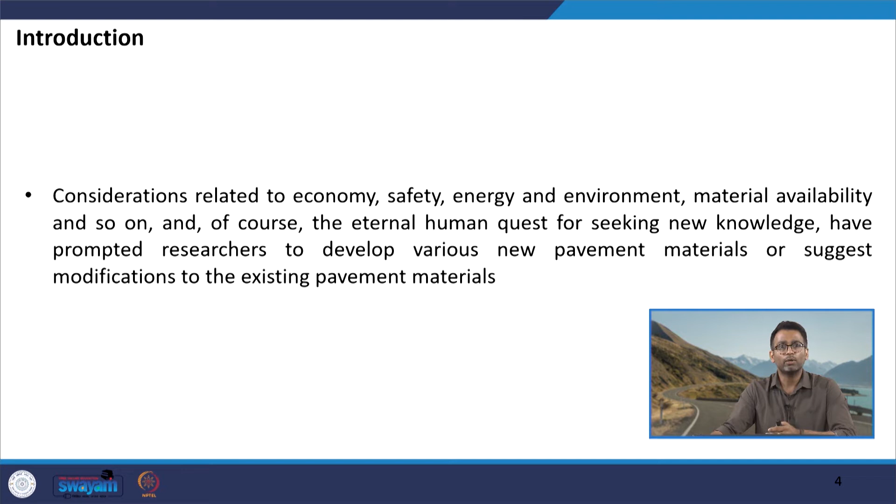So, considerations that are related to economy, safety, energy and environment, also material availability and several other factors have led to the development of new pavement materials, and also have led to the development of technologies that modify the existing materials so that we can optimize their use. So, there is always an eternal human quest to learn new things, to develop new things, and to see if these new materials that are being developed can be successfully applied in various practices.

With this, let us start to talk about some of these materials which recently have been very popular, especially when we talk about their use in asphalt pavements as well as concrete pavements. So, we will start talking about the materials related to asphalt pavements first, and then we will conclude by talking about the developments in the area of cementitious materials as well. So, if you talk about the development in asphalt binders, various technologies can be listed. For example, use of polymers.

We have already discussed polymer modified binder, what they are, but these polymers in different forms are being developed and are being used at varying dosages to improve the rheological response, to improve the mechanical response of asphalt mixtures. Polymers are being used both in virgin and in recycled form. So, for example, if you talk about plastic, we have waste plastics, we have virgin plastics. Similarly, there are several other polymers which can be basically categorized into two broad domains: elastomers and plastomers. So, several elastomers and plastomers have been experimented with and have been very successful as modifiers for asphalt binder.

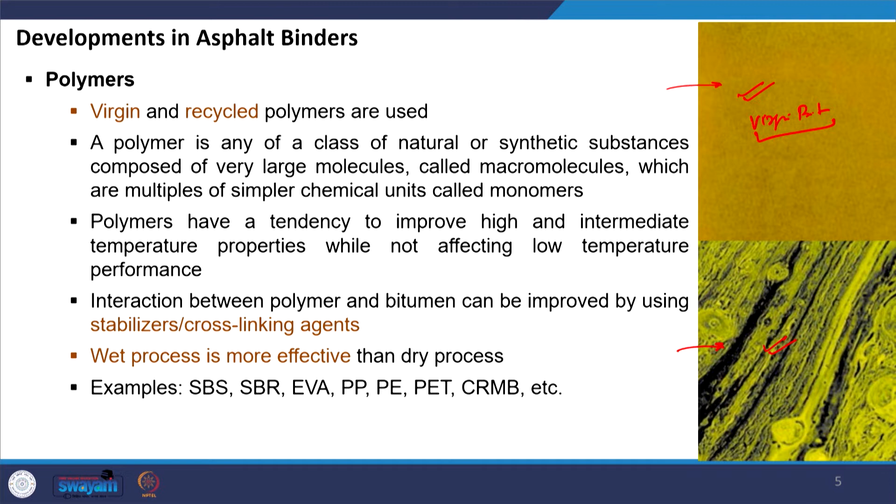In this picture, you can see the microstructure of two different binders. This is what you see when you have only the virgin bitumen under fluorescence microscopy, and here is a picture of bitumen modified with a certain polymer, where you can see a very cross linked state of the base bitumen with the polymeric system. These techniques are usually used to see the compatibility of the bitumen with the polymeric system.

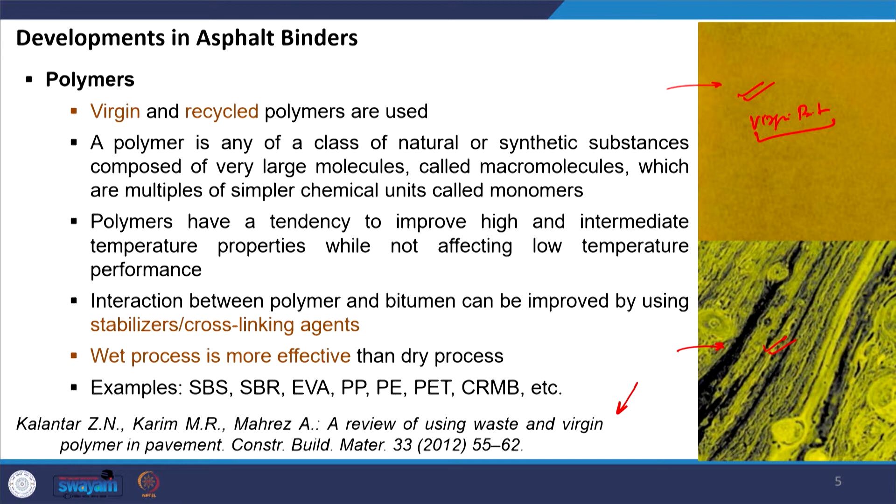In this lecture, I have also tried to include the respective reference from where most of the details of any particular slide have been taken. So, you can visit this paper and get to know more about the topics we will be discussing today.

Then we have nanomaterials, something which is becoming more popular in bitumen modification. Nanomaterials have some specific characteristics. They have high specific surface area, that is, surface area per unit volume is very high. They are small in size, as low as 10 to the power -9 meters. When we define a nanomaterial, at least one dimension should be within 1 to 100 nanometers.

Nanomaterials can be incorporated either through dry blending, where they are directly added to the binder, or through solvent blending, where they are first blended with a solvent, which is then used to modify the bitumen. Various types have been experimented in asphalt mixtures: nanocarbon, nanoclay, nanosilica, nano TiO2, that is titanium dioxide, nano CaCO3, nanopolymers, and various other nanomaterials.

Some disadvantages of nanomaterials are that it is not very easy to synthesize them in the laboratory. It takes a lot of effort and high end equipment. The cost of nanomaterials is also very high, so in industry people are always skeptical about their use because the cost of modification increases.

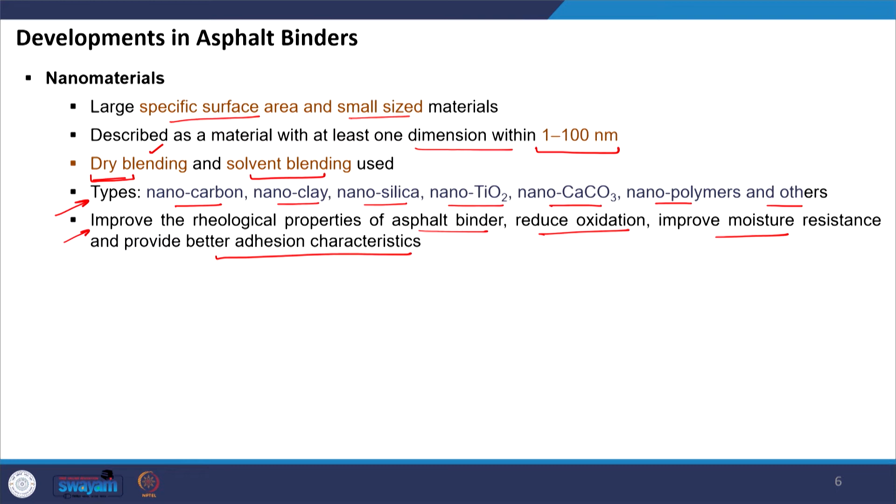They reduce oxidation, which means they reduce the aging in the binder. They improve moisture resistance, and also they provide better adhesion characteristics. So these advantages make nanomaterials one of the very attractive technologies, especially when we talk about bitumen modification. This picture shows the mechanism through which, let us say, the aging can be reduced.

So you see, when you have a normal binder, when oxygen ingresses in this way, it has a direct path to come in and attack the bitumen. Similarly, the volatiles or the lighter components in the bitumen are free to move whenever the temperature increases. But when you have nanomaterials, they interfere with these processes.

For example, you can see the path of the oxygen ingress is hindered by the presence of the nanomaterials within the bitumen system. Similarly, you can see how the volatile components find it difficult to go out once the temperature is increased because of the presence of these nano platelets. So this is the review paper which you can refer to for more details about the use of nanomaterials in asphalt mixtures.

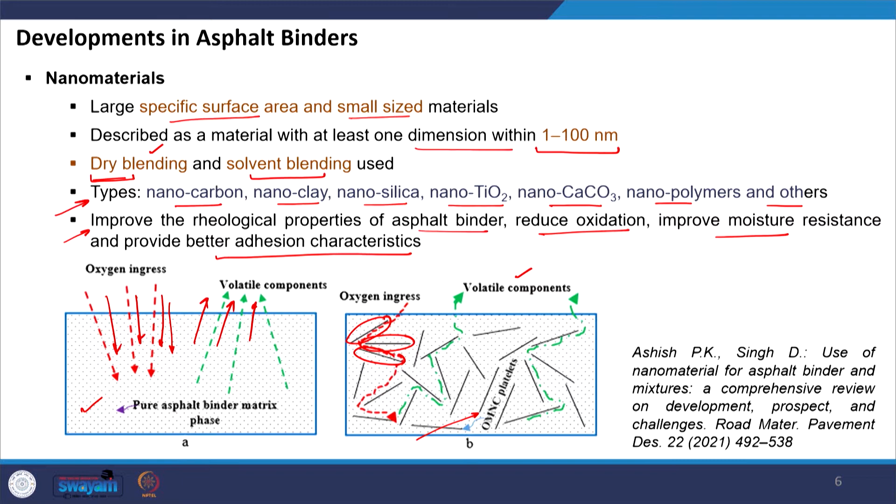Then we also have antioxidants. So antioxidants are basically materials that help us to improve the resistance of bitumen towards aging, and we have already discussed in detail the aging phenomena, which is the accumulation process of diverse detrimental changes, and these changes are built in probably because of oxidation,

loss of volatiles. Here when we say loss of volatiles, it means evaporation of the lighter components, and then we also have the effect of UV radiation, which is a long term process once the bituminous mixture is laid in the pavement, and because of UV radiation further aging of the mixture can take place. So we have several categories here. We have chemical antioxidants. We can also use organic and petroleum based rejuvenators to improve the resistance towards aging.

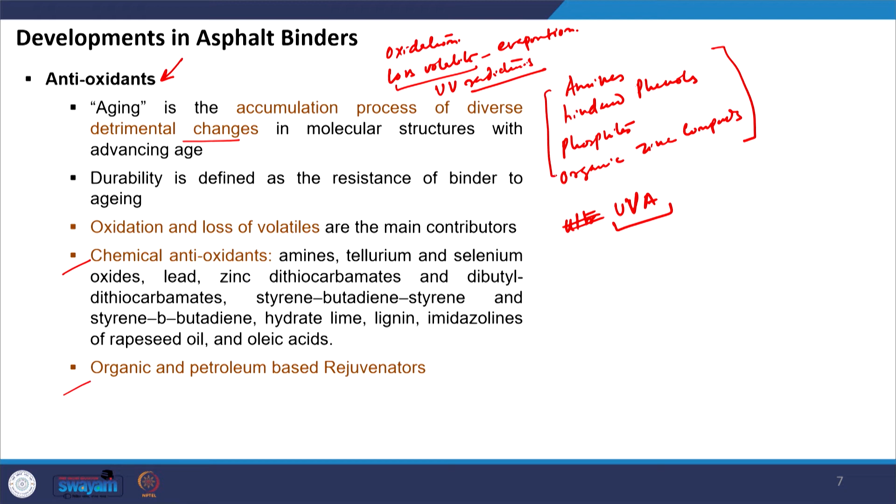When you talk about antioxidants, some of the very commonly used are amines. We have hindered phenols, we have phosphites, we also have organic zinc compounds that are being used. And we also have another category which is called ultraviolet absorbers, UVA. So these are again some of the materials that can be used to increase the resistance of the binder against aging. And ultimately, what is the mechanism on which these modifiers or agents work?

They inhibit the formation of peroxides, which further leads to aging, and/or they have a tendency to absorb free radicals such that oxidation of the binder can be restricted. So, this is about the different antioxidant materials that are being used.

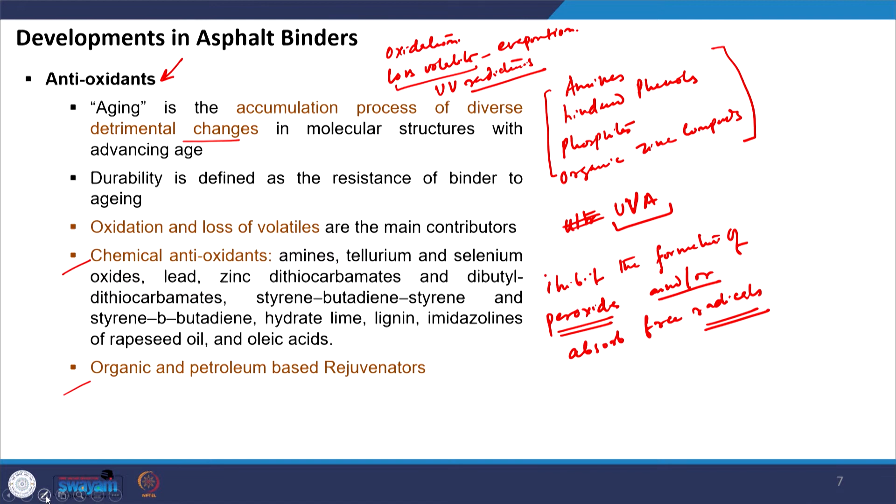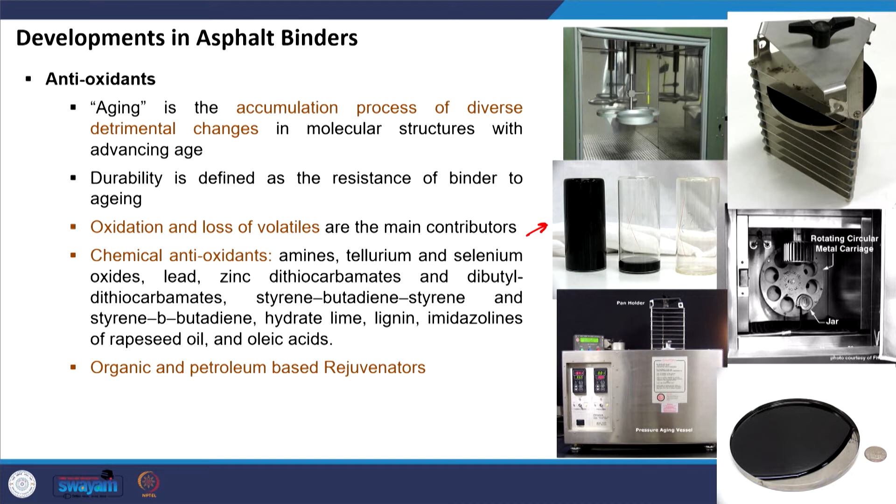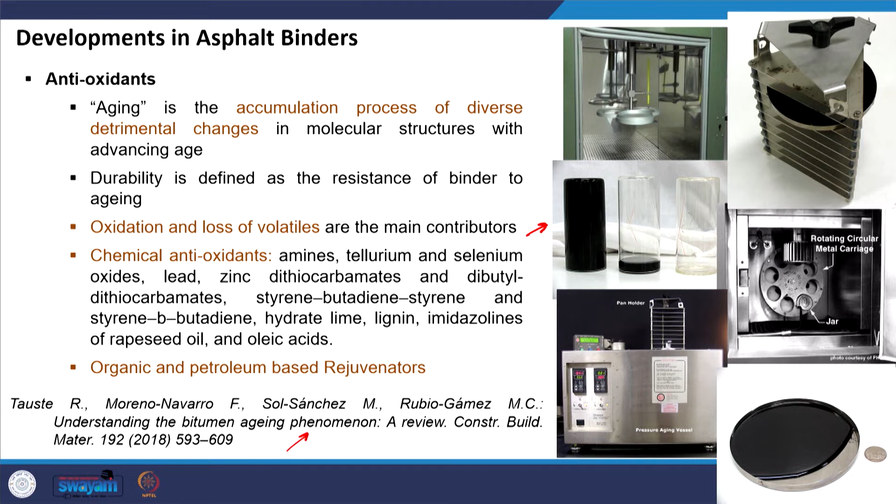Well, this picture shows that we have two types of aging. I am not going to discuss it because we have already discussed in detail short term aging and long term aging, and I hope by now we understand both these forms of aging. So, this is the paper you can refer to which is related to the aging phenomena in bitumen, and they have also given much information about the different antioxidants that are used or can be used as agents to reduce the aging susceptibility of asphalt mixtures.

We also have anti-stripping agents. These are used to resist moisture damage in asphalt mixtures. Again, anti-stripping agents can be of different types. Commonly, liquid anti-stripping agents are used. These liquid anti-strip agents are surface active agents that can be added directly to the asphalt binder, to emulsion, or to cutbacks if we are talking about cold bituminous mixtures as well. These are very popularly adopted by various transportation agencies to mitigate moisture susceptibility of asphalt mixtures.

So, when they are added to the asphalt binder, they reduce the surface tension and they increase the wettability of aggregates. Now, these are almost linked to each other, because if I am trying to wet a surface with another material, there will be an inherent resistance to this wettability.

And this is because of the individual surface energy properties. So, if I reduce the surface tension between these two materials, the bitumen will easily wet the aggregate surface, and this will also lead to better adhesion or higher resistance towards moisture damage.

The dosage of liquid anti-strip agents usually falls in the range of 0.1 to 3%, and these liquid anti-strip agents are either silane based or amine based materials. Okay. So, there are various materials, but originally they are either silane based or amine based.

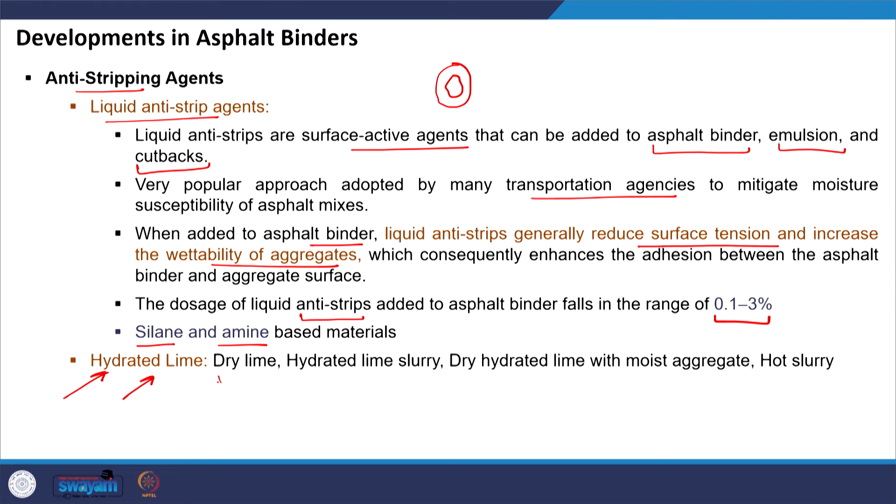So, in fact, hydrated lime can also be added in different forms. We can add dry lime, we can add hydrated lime slurry, we can add dry hydrated lime with moist aggregate, again the reaction will lead to the formation of further products. Some researchers have also added it in the form of hot slurry, and the process of addition will also finally affect the extent of resistance to moisture damage the hydrated lime will provide. So, it is important that we decide which process should be adopted.

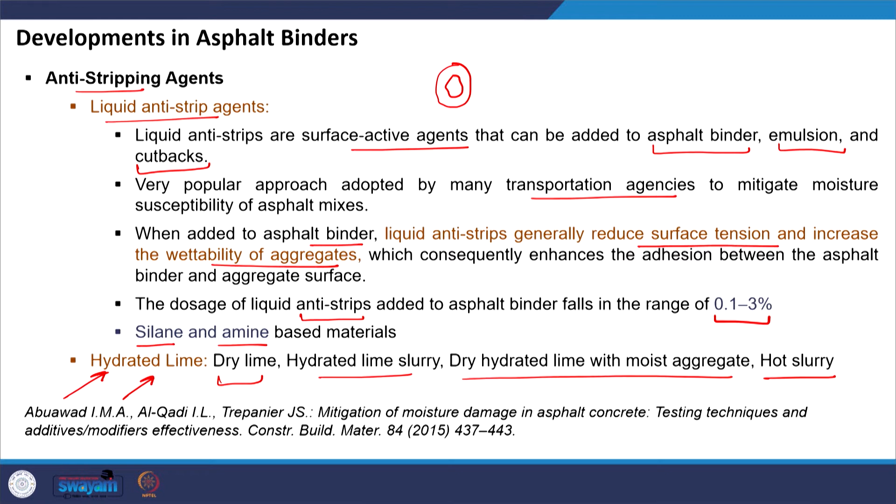So, this is one of the papers you can refer to for knowing more about the moisture damage in asphalt mixtures. Another interesting material that can be used are thermochromic materials. So, these materials will change the color of the pavement depending on the ambient light. Okay. So, these are materials that have higher reflectivity as well as emissivity to solar radiation.

Now, other than thermochromic materials, there are other materials as well that have high reflectivity and emissivity characteristics, and these technologies we call cool pavement technologies. But it can happen that some of these technologies can lead to low temperature distresses. So, what is the advantage of thermochromic materials? They will reflect solar energy at high temperature, all right, and they will reflect less solar energy at low temperature. So, how does it happen?

This can happen by changing the surface color of the pavement. So, try to understand that if you have a very dark surface, it will have a tendency to absorb the heat. If you have a light surface, it will have a tendency to reflect the solar energy or the radiations that are coming. So, in the daytime or in the summers when the temperature increases, I want my pavement to look lighter, and when the temperature falls, I want my pavement to have dark characteristics, so that the stiffness properties can be maintained at both temperature ranges.

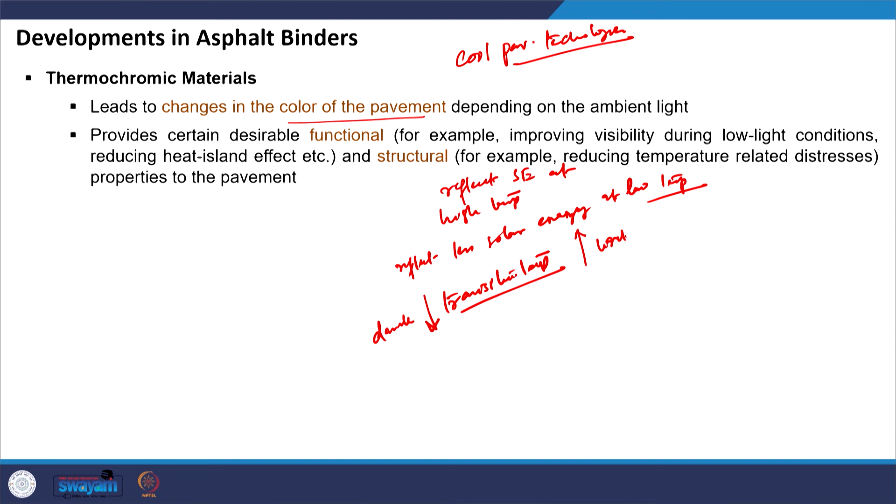So, these materials have some specific transition temperature. Below the transition temperature they become dark, and when the temperature increases they become light in color. This way they are able to provide resistance towards distresses related to high and low temperature in the asphalt pavement, and they are typically used at a rate of almost 5 to 6% by weight of the binder.

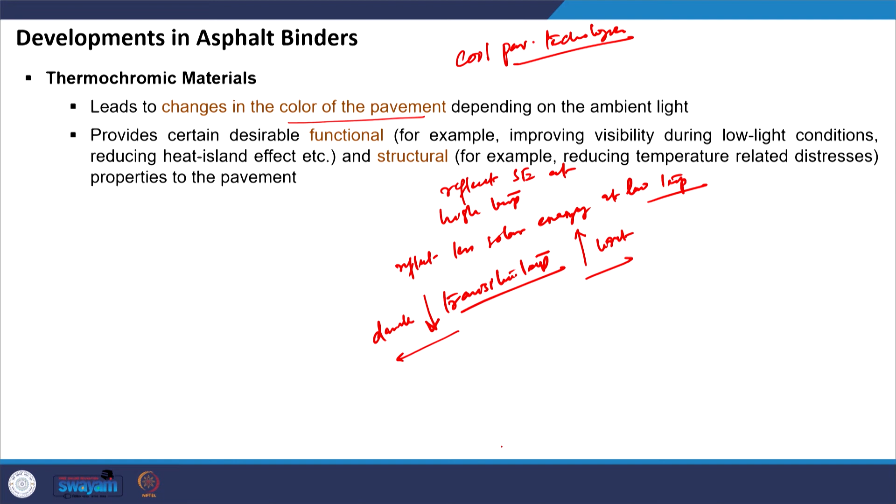Then researchers are also trying to explore avenues for alternate binders, because we understand that bitumen is a petroleum product, crude oil prices are rising, and it's derived from a non-renewable energy source. So, therefore, various attempts have been made and are being made to use binding agents in asphalt mixtures that are not from petroleum origin.

One example is sulfur extended asphalt. The problem with sulfur extended asphalt is that when you heat sulfur to temperatures typically greater than 120 degrees Celsius, there is an emission of H2S gas which can be very harmful. So, this is one of the reasons this technology did not become very popular.

However, there has been research that has tried to find effective ways to reduce the emission of H2S gas. They have used free radical inhibitors and redox catalysis processes, using which the emission of H2S gas in SEA, or sulfur extended asphalt, can be minimized. Another category in alternate binders is the use of bioasphalt.

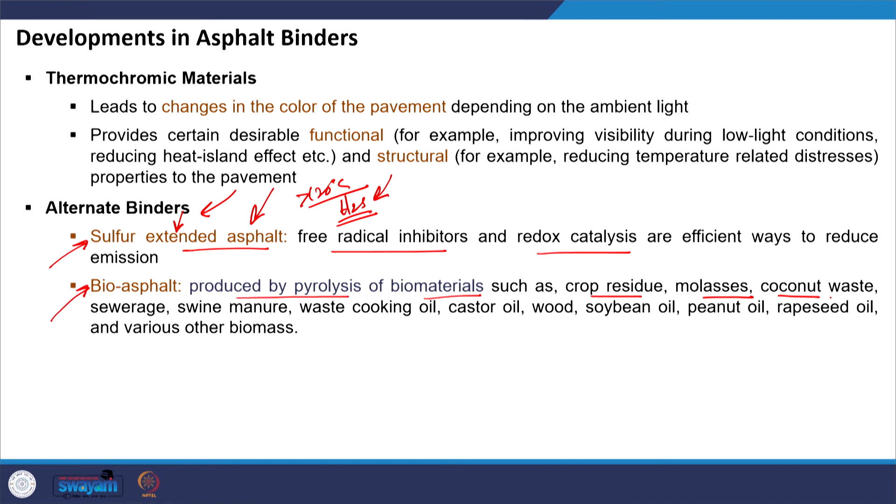So, bioasphalt is basically produced by the pyrolysis process of biomaterials, and various biomaterials have been used to extract biobinder, which has been used mostly as a partial replacement of bitumen in the production of bituminous mixtures. This biobinder can be derived from biomaterials such as crop residue, molasses, coconut waste, swine manure, waste cooking oil, castor oil, and you can see a lot of other biomasses have been explored.

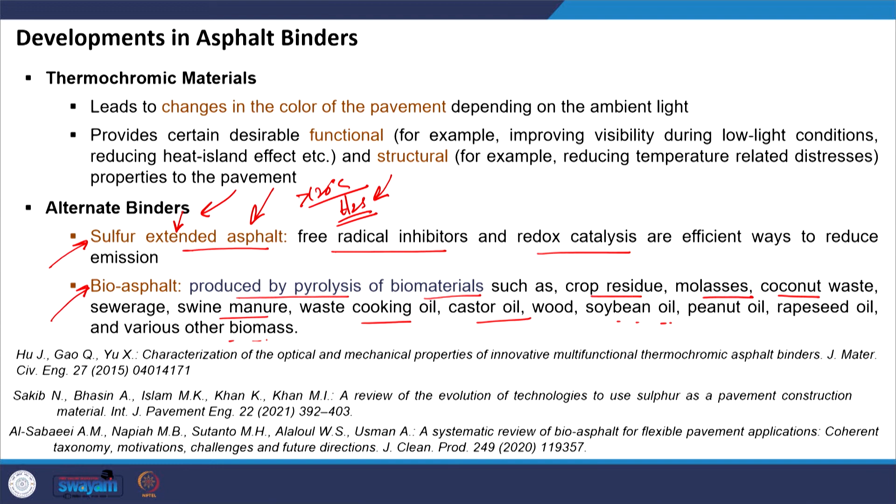And again, these are some of the important references that can be explored to know more about thermochromic materials and also alternate binders. With this, now let us shift our discussion towards developments in aggregates and soil. Okay.

It is very interesting to note that the research done on asphalt materials and asphalt binders is more in comparison to the parallel research done in the area of aggregates and soil. And this is not surprising, because if you look at the asphalt mixture, the volume has 70 to 80% aggregates and let us say 10 to 12% binder, but if you see the cost of the bituminous mixture, 70% of the cost is because of the presence of bitumen, which makes it a very critical and important material.

And also when we talk about the performance of asphalt mixture, the response of this mixture is a direct function of the rheological properties of bitumen. So, on one hand it is not very surprising that a lot of effort has been put into research about bitumen more in comparison to other materials.

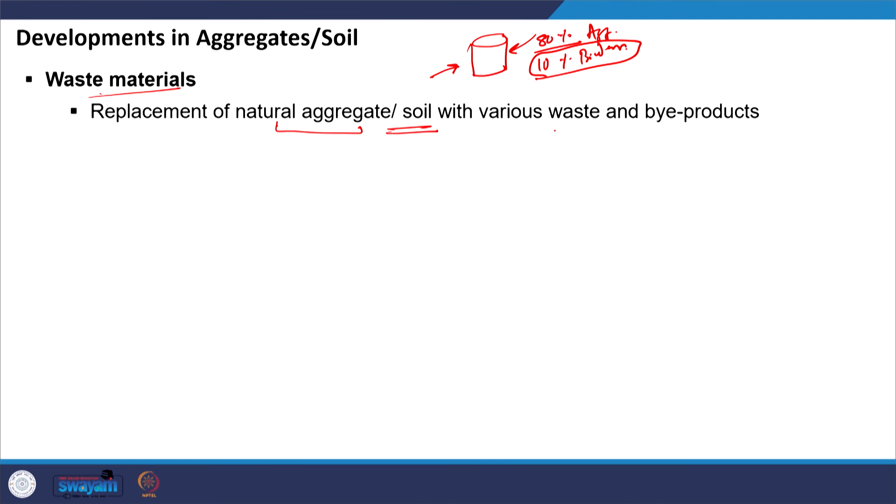When we talk about aggregates and soil, people have tried to use waste material as replacement of natural aggregate, because natural aggregate is obtained from natural sources, and similarly for soil also. And various byproducts, mostly from industry, have been used as a replacement of natural aggregate. Marginal materials have also been used.

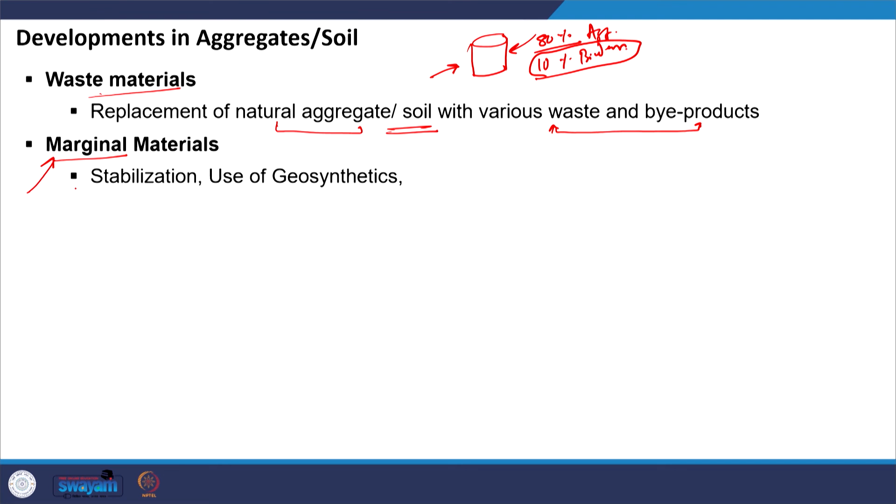Marginal materials are those materials which in their normal state do not meet the desired specification ranges as given by the highway agency. Let us say the impact value is very high or the Los Angeles abrasion value is very high, and it does not meet the pass criteria for its use in the construction of pavements. So, these materials have been stabilized. People have used geosynthetics when they encounter marginal materials at the site to improve the performance of the asphalt pavement.

Similarly, there is research on modification of soil using various geopolymeric materials and various biostabilization techniques. Some of the bio-based products include secondary metabolites, enzymatic and polymeric materials, etc. These technologies are also considered one of the sustainable methods to build road infrastructure. Again, these are some of the references where details about these materials can be found.

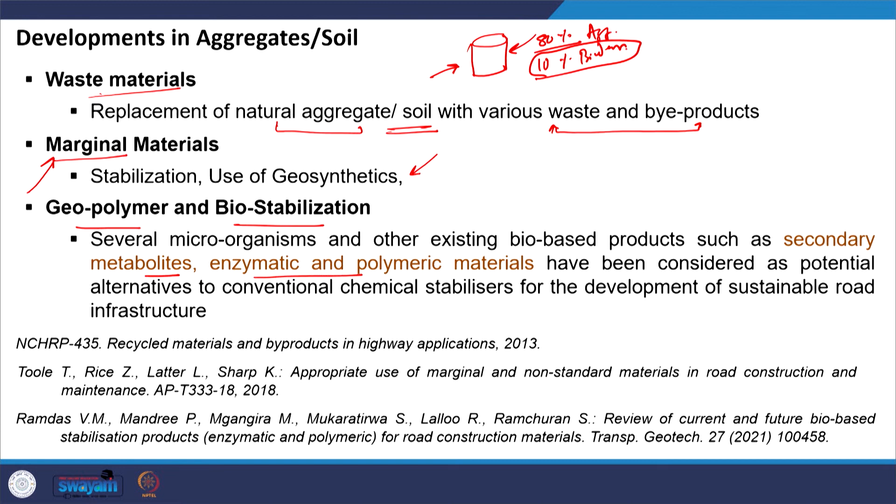In the area of aggregates and soil, people have also attempted to use thermally conductive aggregates. So, what are thermally conductive aggregates? These are aggregates that can convert thermal energy into electric energy, which means they have high conductive ability, and this conductive ability helps them to convert thermal energy into electric energy. But there has to be some thermal gradient. In fact, the use of thermally conductive aggregates works on the principle of the Seebeck effect, which says that if there is a temperature gradient in the thermoelectric material, it will convert thermal energy into electric energy.

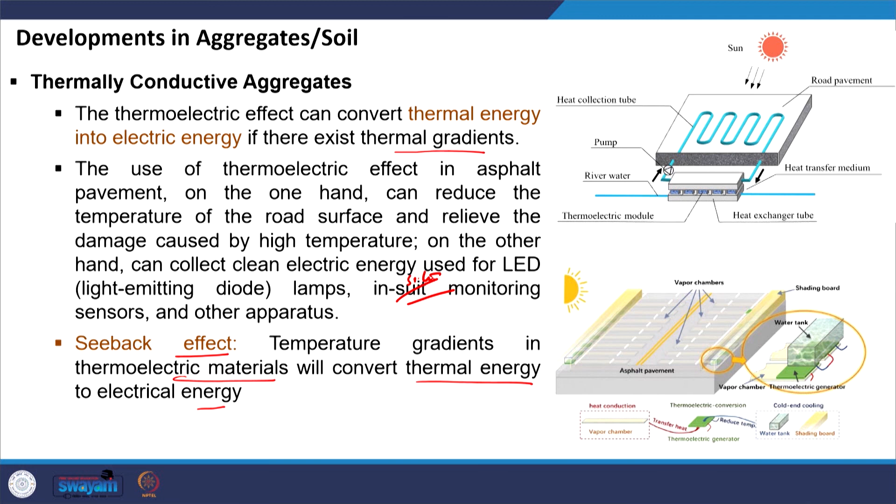So, we will stop here today. Just to recap, we have discussed the recent developments and advances that have taken place in the area of asphalt binders and aggregates and soil. We will continue our discussion from here in the next class, where we will be talking about similar developments that have taken place in the area of asphalt mixtures and cementitious materials.